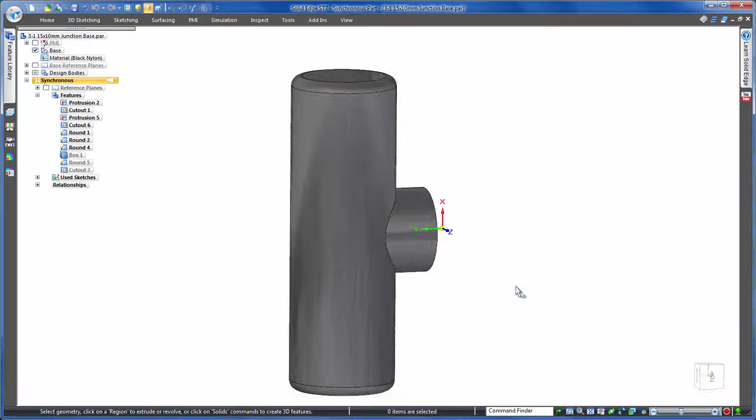However, synchronous technology in Solid Edge also allows you to reuse individual design details. In this example, we're going to create a custom fuel adapter starting with a basic body and then simply reuse design details from other Solid Edge projects to complete it.

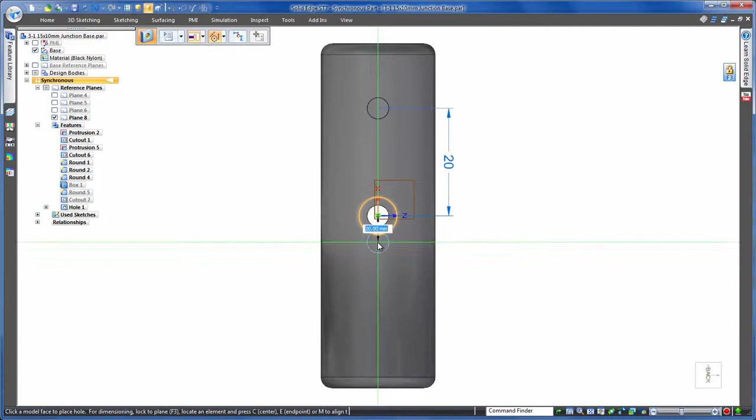First, so that we know where our output ports are going to go, we'll quickly create a few holes. Notice how quick we can space these, no separate dimensioning tool required.

Now for the barbs, and this is where we can save lots of time and effort. I know that we've created geometry like this before on another project, this blue component, so why not reuse this detail rather than waste time modelling from scratch.

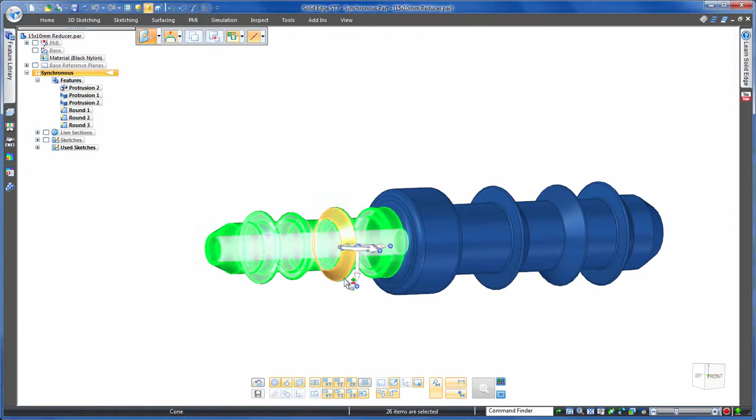We simply select the detail we wish to use. The well-known Windows Fence Select saves a lot of time here. Notice that we're moving what we call the steering wheel to a specific position. This is our main control for synchronous technology, and here it'll help us locate the detail in our new part.

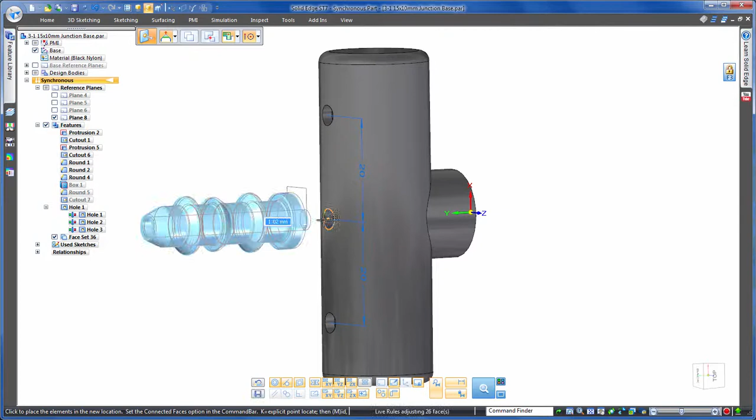Then simply click copy, or use the Windows Ctrl+C shortcut. Back in our custom fuel adapter, we just paste it in, again using the Windows shortcut Ctrl+V if you like, and you can see our steering wheel is just where we left it, so placement becomes the simple task of snapping into place. And if you think you'll be using this detail again in the future, you can just store it away in the library.

All you have to do is open your library pane and paste it into here instead. To reuse it, just drag and drop.

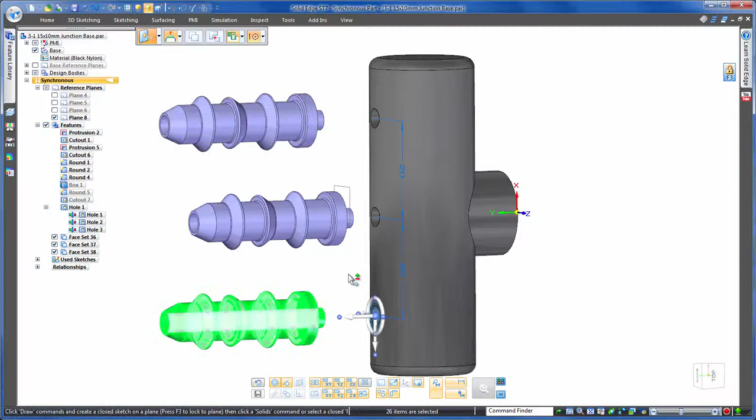The steering wheel can also be used to enter precise offset values. Here we'll offset it exactly 15mm and then snap the barb into place. Additionally, by holding down the control key while we drag the steering wheel, we can copy this barb to the other location required. Again, notice the familiar use of Windows shortcuts. Holding Control in Windows does the same thing, copies, quick and easy.

Now that we have the barbs in the correct location, we need to figure out how we're going to attach the geometry to the part. Luckily there's no need to worry about such things as Boolean operations, as Solid Edge will take care of this. Watch as it automatically extends to connect to the solid geometry.

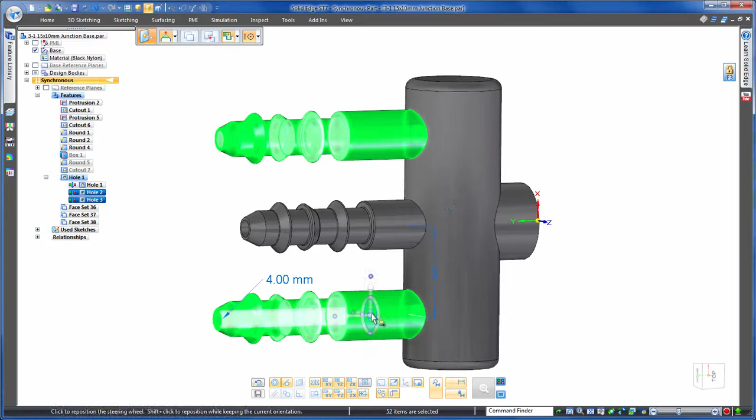But what happens if we realise after pasting these barbs that we want to move them, perhaps to help hose clearance? No problem, we can use the steering wheel at any point in time to make required mods. Let's quickly add an angled offset here to the top and bottom connectors.

Now that we have the output side of this fuel adapter finished, let's take a look at the fuel flow sensor side. Again, we have the basic geometry here. However, rather than modelling the internal sensor housing detail, let's also reuse this 3D detail from another project.

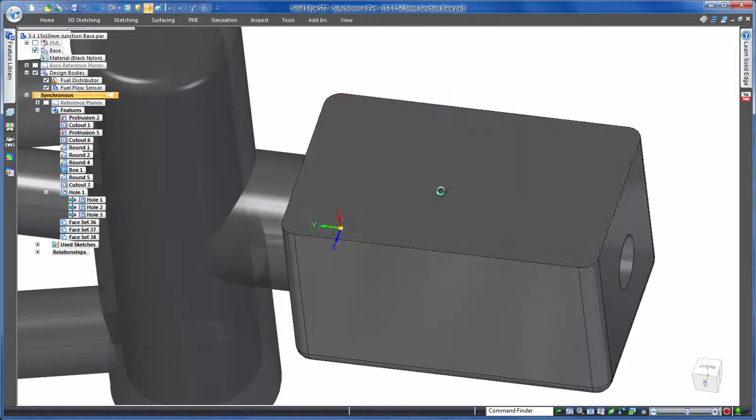The housing detail is already in our library, so all we need to do is drag and drop like before, and again use the steering wheel for placement, this time ensuring central alignment. Notice that when reusing 3D detail, not only can features add geometry to parts, but they can also remove geometry at the same time. Furthermore, Solid Edge will also bring through design intelligence.

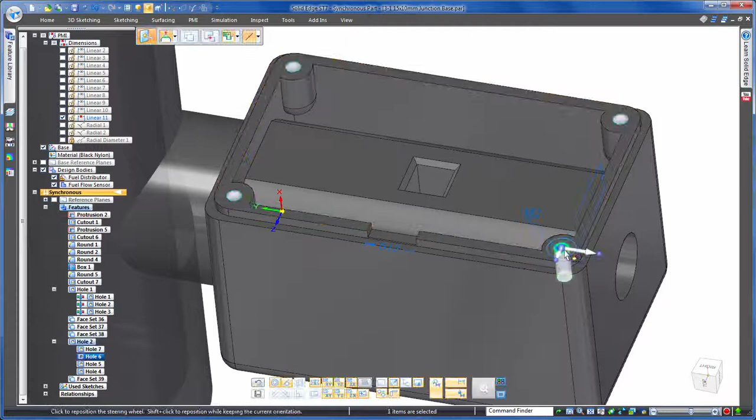For example, here the holes aren't just cylindrical pieces of geometry, they're real holes, so we can accurately modify them to suit. And as for this cutout, a key dimension has come through so we know to tweak for our requirements. Now that our custom fuel adapter is finished, let's complete the assembled unit by adding the sensor.

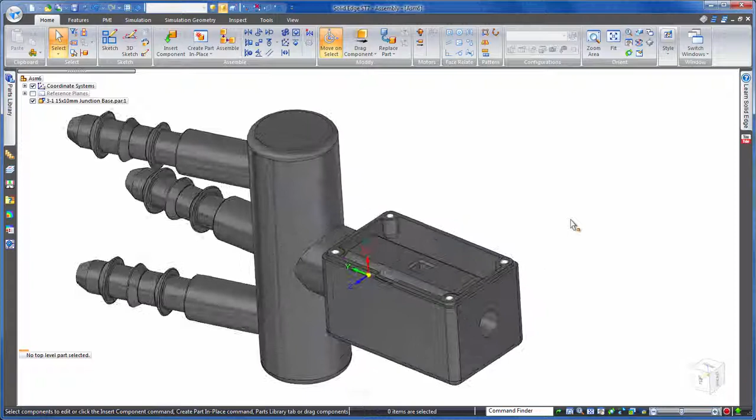Of course, here we're reusing a whole model rather than specific 3D detail, but still Solid Edge helps us out by reusing the assembling detail, its positioning references, to accelerate placement.

In summary, we were able to precisely create our new component in just a couple of minutes, all thanks to synchronous technology in Solid Edge. It allowed us to easily reuse 3D detail from other models with just a simple copy and paste.